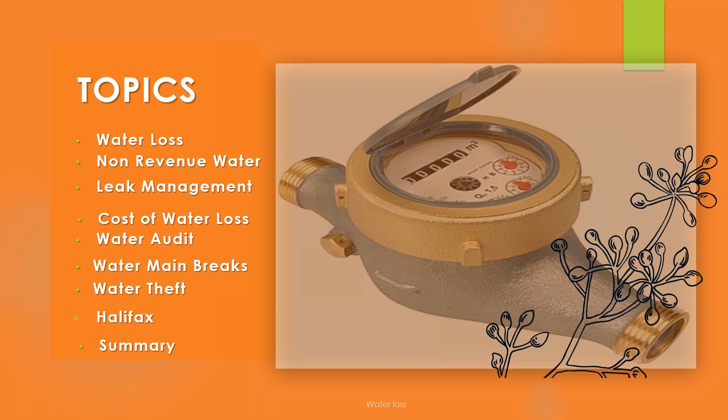In regards to the water aging piece, I've kind of put that in among these topics, so as they come up, we will chat a little bit about them as well.

So let's start with the introduction. We all know safe drinking water plays a crucial role. It promotes everything in our communities, right? It's health, food production, green grass, manufacturing. So really all aspects of our life, water touches. Over the years, we focused really hard on getting the water to the customer, making sure it's safe to drink, and I think most of us in the industry today have done an outstanding job of this, but we can do a better job.

Now we've got to look at some of the revenue and how we actually do business. So we have challenges, we all do, and every municipality out there does, in order for us to do business. We do such a fantastic job. So now let's look at how we can be efficient in supplying and making sure that we're making revenue so that we can continue to serve our customers.

Again, one big thing, and you guys have all probably seen this in the last few years, is the whole topic of capital reinvestment. All our pipes are getting old. So it's really important now that we're making a move to make sure that we're upgrading the mains that are in trouble. All our infrastructure is aging, and we need to make sure that we're putting better infrastructure in the ground.

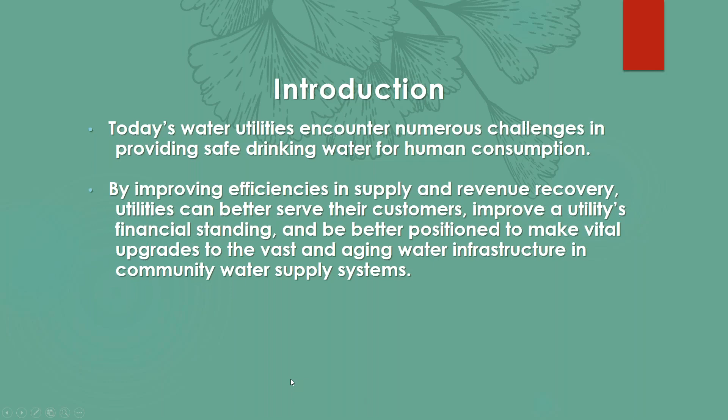You know, abundant resources, it was always available for us. But we're seeing some stuff happen now, right? Climate change, and we see it. We've seen it with the droughts in the Okanagan, the weird rainstorms in the Lower Mainland, look at Merritt and those places. Huge changes in our weather patterns and all these environmental stresses that are out there. So for a lot of the water utilities out there, the amount of water they have today is likely the greatest volume they'll ever have. So let's make sure we're treating this with utmost care. We have to make sure we're accountable in the practice of delivering the water and highly efficient in the operations.

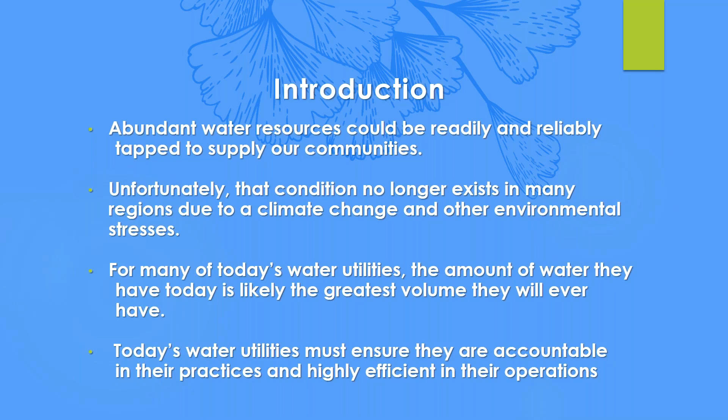So here's what we're seeing, right? Droughts and weird weather patterns. So we just got to make sure that we're on it.

So let's talk a little bit about water age, and it's exactly what the title means. How long is the water in our system? We do a good job bringing this water in, we treat it in various different ways, whether it's just basic chlorination and disinfection, or a full treatment process. That water leaves our facilities, goes out into our pipe network, into reservoirs, and makes it to our house. That takes time.

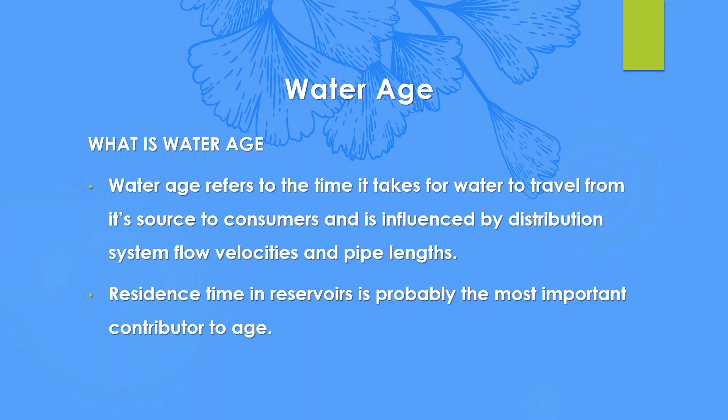So that time it takes for the water to travel from our treatment facility to our customers is influenced by the distribution, the flows, how long our pipes are, how long it sits in those reservoirs. So we have to really start thinking about this. What's a reasonable time to have water sitting in our system? And then we have to look at, okay, if the water's not leaving that reservoir in a given amount of time, what are we going to do about it? And if you're living in a municipality that has different requirements due to agriculture, or people use a lot more water in the summer for washing cars and watering grass, that makes a huge difference. So adjustments are going to have to be made to the operation of the system in order to keep that water age correct.

When we look at it, we're going to do kind of an assessment. It's always good to figure out what is the oldest area of water in our system. We all have dead ends, maybe areas that don't have big usage, or larger facilities that don't have a lot of usage. The age of the water affects the chlorine levels, and when there's chlorine decay, we all know there's potential for biological growth, so we always have to be aware of that. Areas of low demand create low velocity, and that in turn creates increased water age. For those of you that use technologies like altitude valves to fill reservoirs, you always have to make sure the turnover in these reservoirs is correct, or else you end up with some dead spots.

We all know some of these older reservoirs have one pipe in and one pipe out, and you get these cells in there that don't move around.

Mixing and reservoir management are top things you need to look at to manage water age. Water age is really a simple surrogate for evaluating some of the water quality issues in your distribution system. Take a look at what you have coming in for complaints, maybe that's one particular area, maybe it's more widespread. The distribution system tanks are definitely a major contributor, and some of the older tanks lack the baffling, with just one pipe in and one pipe out. I think all the new ones coming on are much better designed. Hydraulic modeling in your system is a really valuable tool for examining water age, and this modeling can identify the problem areas and look at solutions that could be done to rectify that.

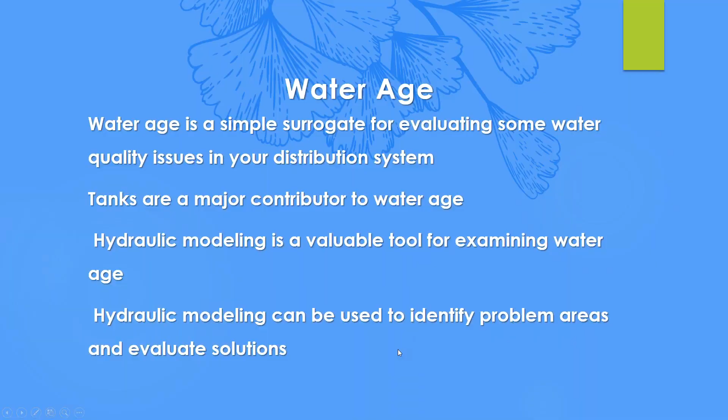Let's focus now a little bit on the water loss side of it. I'm really curious about water loss because I think there's a bunch of stuff out there that we don't even realize, and when I was writing this particular form, I was like, oh wow, I didn't even think of that. So let's go through some of these things. So what is water loss?

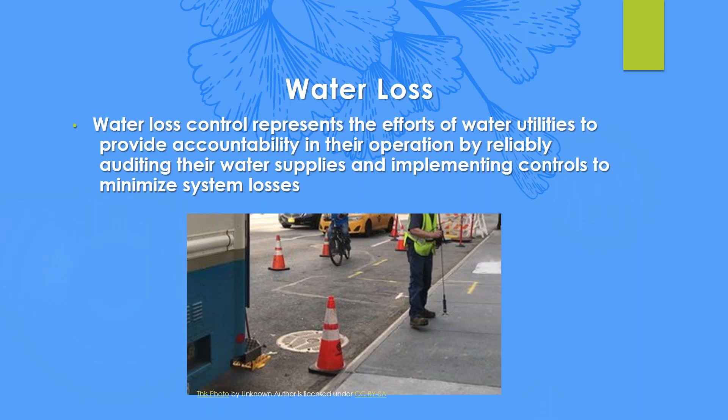It's the efforts of a water utility to provide accountability in their operations. We want to audit our water supplies. Typically we do a really good job of bringing water in, knowing how much we brought in and how much goes out the door. A lot of us have the larger flow meters, so we know exactly what's coming through those stations. But once it leaves our facilities, do we really know how much actually gets to our customers?

You don't know what you got till it's gone. I know that's a cheesy 80s song, but it's really true here. How do you know how much you're really losing? So it's really important now to look further into what happens when the water leaves our facility.

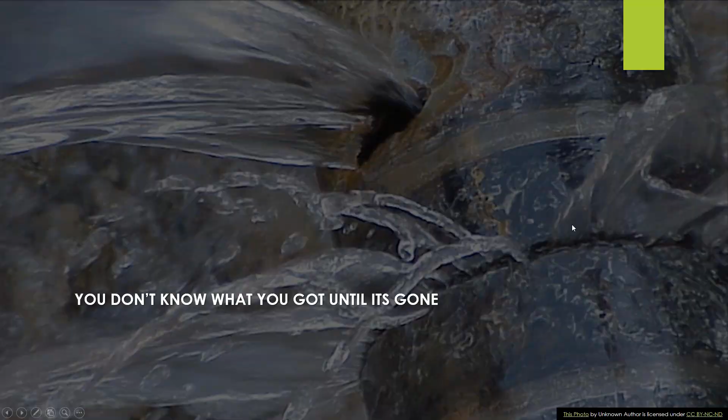Utilities, big and small, incur losses, typically pipeline leakage and apparent losses. These are the losses we don't even think about. When you see a water break or a leak, that's really easy to get your head around. We'll talk about something called apparent losses, and that's really going to be something to talk about here.

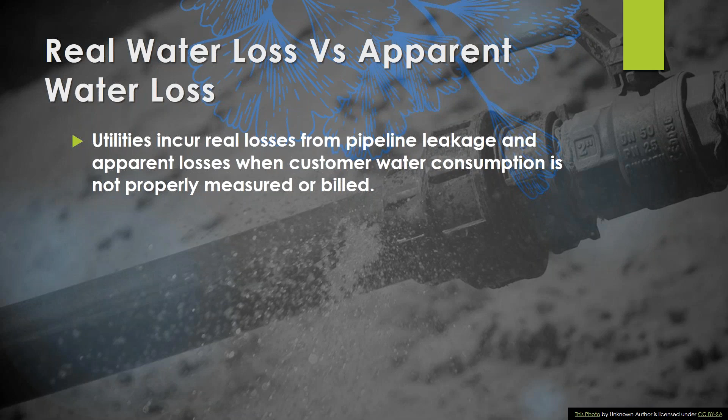This could be a number of things. The biggest one is that consumption is not properly measured or not properly billed. If you look at folks out there who do not have a metering program or do not meter their water, that's a huge one. We're estimating or assuming how much water is being consumed by our consumers.

No water system's perfect. Everybody has losses, and that's going to vary from system to system, and that can have something to do with how much water is going through that system. How old is that system? How well was it built? What type of pipe is in there?

Unfortunately, most water utilities do not regularly audit or account their supplies to quantify the losses that go out the door. And again, it's fine to have losses, but there's a cost to this, and this cost goes to our customers.

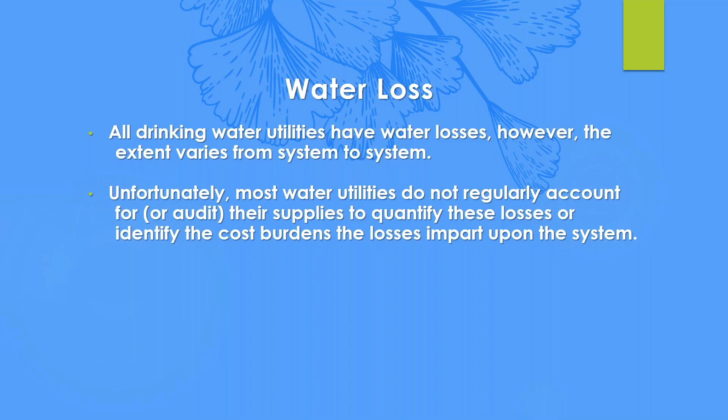We talked about that first one, right? The losses in utilities include the physical escape of water from the pressurized piping system, and that's leakage - that's real losses. But the other side of the coin is inaccurate metering of the customer's consumption, theft is a big one, and maybe issues in the billing itself.

One big one I always shook my head at is that we pay for water and new subdivisions get built and we put a reservoir on the hill. None of the houses are built yet, and as one or two houses come online, that reservoir is full of water. Now, because of the importance of water age, that water times out. So what happens is your crews go out, use a fire hydrant, and basically flush the water that's aged out of that reservoir and put fresh water in.

That water leaves - it didn't go through a water meter, it did not go to a customer. It was lost, and because it was lost, we didn't get revenue for that. And when we don't get revenue, basically everything costs more for our customers.

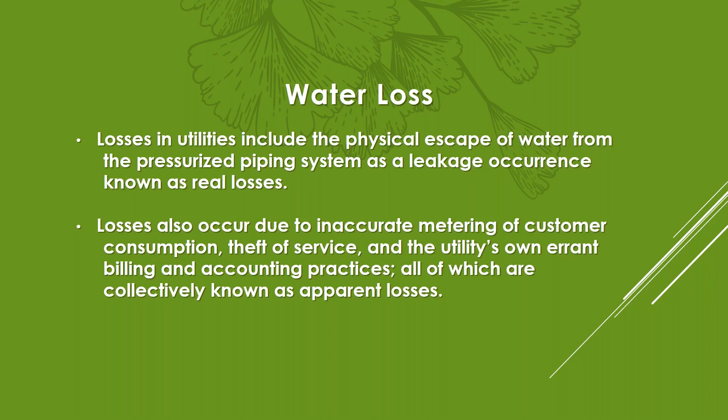Another one is the older, poorly constructed pipelines that are out there, and we all have them. Stuff that was put in the 70s and 80s is starting to leak a little bit - maybe they didn't have the corrosion protection they should have. For those folks who use ductile iron pipes, you see what happens - valves and things of that nature, they leak. Maybe there's a problem with the bonnet, maybe there's some damage to them. These all form contributing factors to the leakage.

One effect of water leakage, besides the loss of water resources, is reduced pressure. So you have a subdivision where maybe the pressure isn't quite where it should be. As a utility, maybe you tweak the pressure reducing valve or pump a little harder to increase that - and that's energy consumption, and that puts strain on other portions of the water supply system.

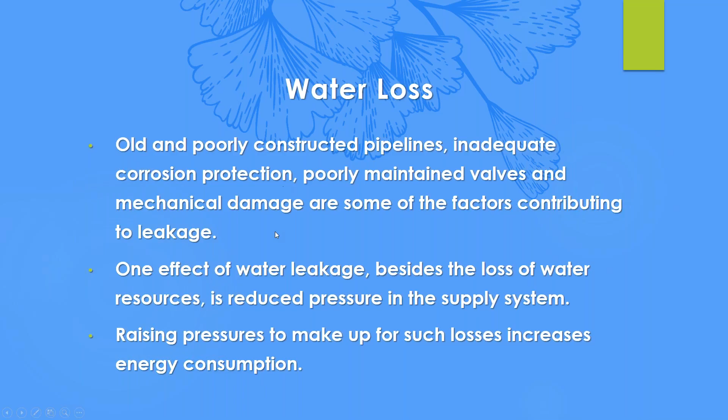Just a rough note here - let's aim for 10%. If I have 10% water loss, I think we're doing pretty good. But as you start creeping to 20 to 30%, we really need to think about what's happening. Think about 30% - if you have a facility putting out even 1 million liters a day, think about what 20% losses is, times that by 365 days. That's a significant amount of water out the door. And if you look at your bylaws, or if you're charging for water, that's a loss of money, because that water did not end up at a customer and was not purchased.

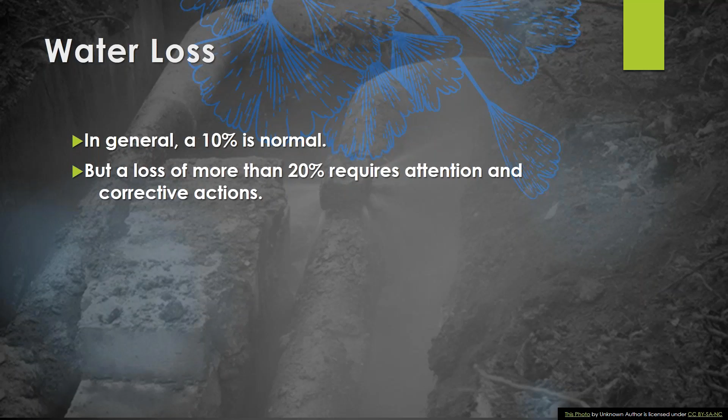Let's talk a little bit about non-revenue water. That's something we don't even think of. This is the real plus apparent losses, along with the unbilled authorized consumption. This represents water that's used for things like firefighting or hydrant flushing. Most people working in distribution have flushed hydrants, right? You open up that hydrant and water escapes. In a major structure fire, there could be up to 3 hydrants pumping water, and that's all authorized consumption, because that's the whole object of a fire hydrant. But this water does not go through a water meter, and it's not captured.

Non-revenue water comprises the volume utilities lose from their water supply infrastructure. We still have to treat this water. We still have to get it from the environment. We have to add chemicals to it. We have to make sure it's safe. So we still have to go through all the motions. It's just that we're not recovering the revenue.

It's lost revenue from a portion of this supply that reaches the customer and isn't billed. That's the big one. We're flushing that hydrant as part of maintenance. Imagine if you have a medium-sized community, how many fire hydrants do you have? How long do you run that hydrant for? If you added up the amount of liters that come out of these hydrants for maintenance purposes, that's non-revenue water.

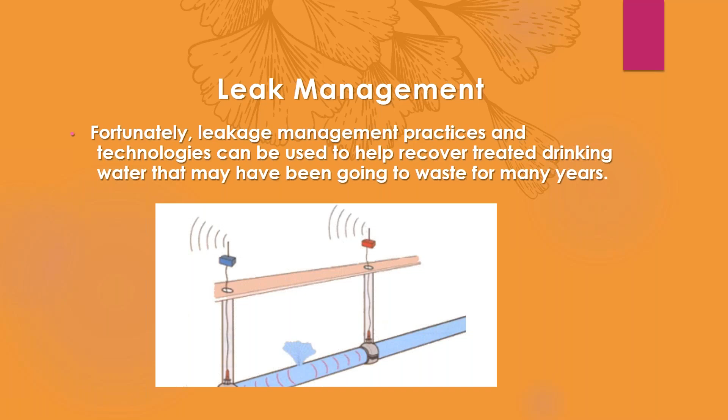We can also put loggers and different listening devices onto hydrants and valves overnight, and you can get an idea if there's potential leakage anywhere. Ground microphones as well, so you're listening. It's really a game of let's listen and figure out where and if there's a leak. Let's not wait till we see it come to the surface. Let's do a whole sweep of our infrastructure to make sure all the water's staying inside the pipe and it's not running through.

Typically what they'll do is go at about 3 in the morning, when there's very little traffic out there, so it will listen and be able to determine if there's leakages. Sometimes we do hear it, and we'll go back out again just to make sure - maybe somebody was doing their laundry at 3 in the morning - so we'll do it over a number of days just to make sure the data is correct.

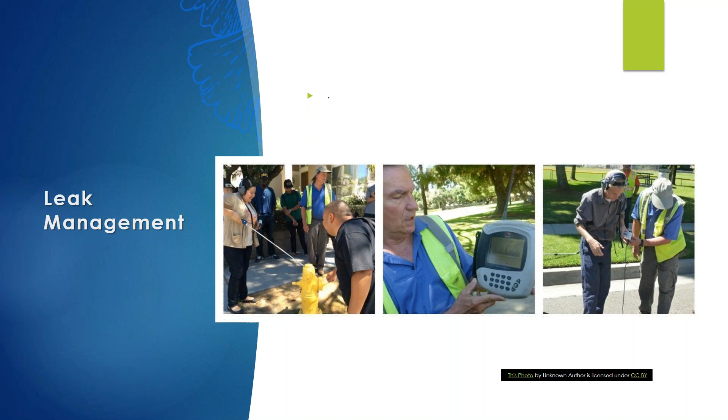Apparent losses mean that water utilities do not realize all the revenue needed to reinvest in the system. Really what that means is I think I'm getting all the water, but I'm not. And all that water that's leaving, I'm not getting revenue for. That means I don't have the revenue to do the repairs or reinvest in the system and keep up on the maintenance costs.

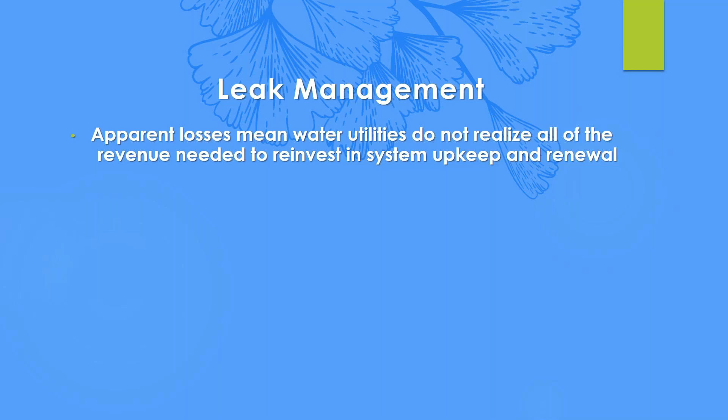By minimizing the apparent losses, utilities can bring in additional revenue, which is fantastic, or not lose the revenue they projected in the first place. That helps fund the system renewal. And really, that is the big thing - aging infrastructure. I said that earlier in the presentation. It's happening to all of us, so we need to be prepared for this.

So what's the cost of this? Losses cost money, so let's really look at how much this really does cost.

The cost of producing drinking water varies from utility to utility, depending on what you have for a treatment process. You can have a very simple groundwater well and add chlorination to it, or you can have a full-blown water treatment facility, adding different chemicals and using a fair amount of energy to produce the water you need for your customers. Again, there's a big difference between a smaller system and one that puts 100 million liters out the door a day. And geography matters too - what do you have for water? Am I pumping it a long distance from the source to the treatment facility? In some places, they have a greater cost for energy than others.

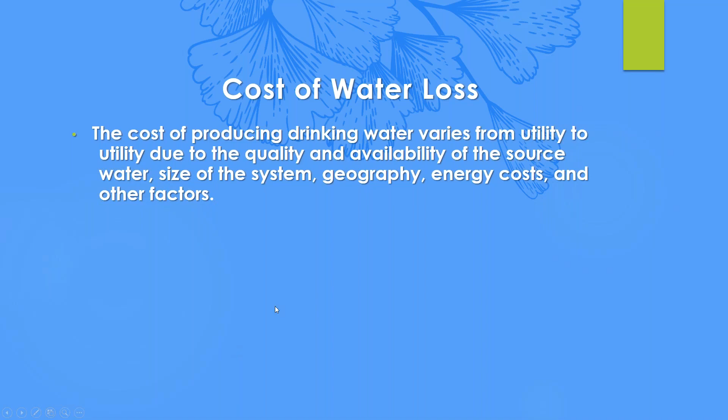Typically, we withdraw water from a source - rivers, lakes, or groundwater, or a blending of a number of these. Water is then treated to regulatory standards and pumped through an underground piping network, finally reaching your customer.

A lot of places will purchase treated water from neighboring systems, and when you're purchasing water, that's a huge cost. All of this is a cost associated with treating water. We also have to pay our staff, we have to pay the administration, and we have to pay the electricians and millwrights and contractors that keep this going.

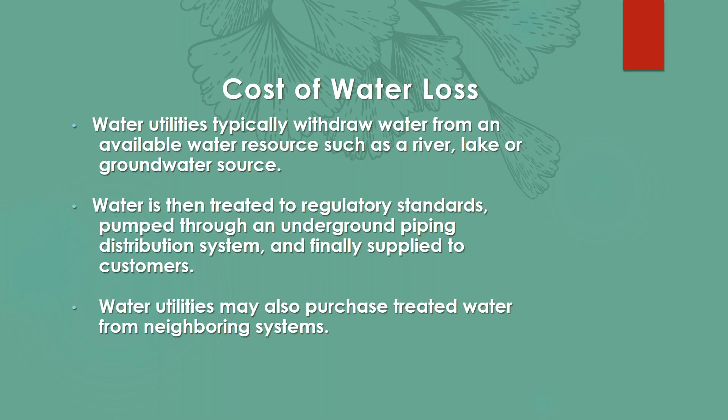Most utilities now include water meters. And I think water meters is a fantastic thing in regards to this. It's really hard to account for losses when you don't know what's going to your customer.

So most utilities now are moving towards a water meter based system. And that basically measures the supply of water, records the quantity, so that I'm billing on what you actually used.

Imagine, in the old way of doing it, you have two houses, very similar size, and one has 4 kids and the other one's just a retired couple, and they get charged the same. One's using 4 times as much water than the other. So it's really hard for a utility to estimate how much water is used and how much revenue is brought in.

Unfortunately, all utilities incur some sort of inefficiencies or losses throughout their system, both in supply and because of customer-related functions in the operations. It's a long, twisted way to get water to your home, and there's a lot of spots in there where it can go sideways.

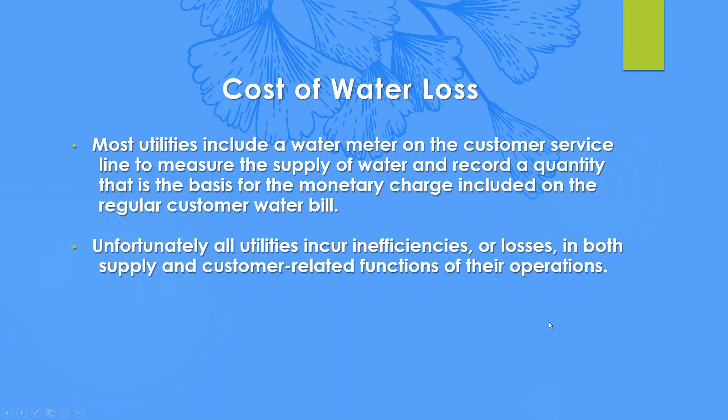The cost impacts, such as quantities of losses, are hidden from utilities and their customers, right? The water rates go up. We're adding 10 cents more per cubic meter onto your bill, and you don't really realize it, but it does happen. The paying customers ultimately bear the financial burden of the utilities' inefficiencies, and we have to do a better job of making sure that we're efficient.

In the exercise of setting water rates, that's done by an estimate. We're saying that there's this many people, and based on historical data, this is how much they use, and this is how much we should charge in order to pay for the system that's running, be able to do the repairs and maintenance, and also have money for capital reinvestment, replacing some of that aging infrastructure.

When all of a sudden we have more and more leakage, that water is not getting collected in our customers' homes, not getting revenue, and that becomes a big issue, and we have to start raising water rates to reflect that.

Water utilities set customer rates and charges that are specific to their own cost of doing business. And that's going to be different no matter where we are.

When a utility experiences this leakage, especially in its water distribution, the losses drive up the production cost. And basically, we also have to withdraw more water from its sources. We talked earlier in the presentation about climate change, and if you have a low reservoir to begin with, any sort of efficiency we can achieve is greatly appreciated and helps all the communities out there.

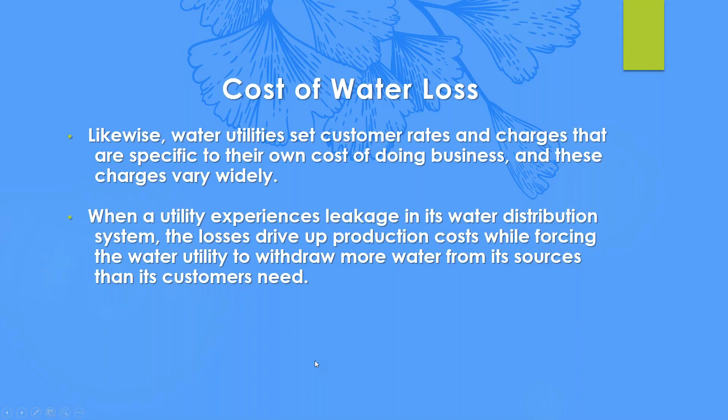We'll talk a little bit about the apparent losses now. This is the inaccurate customer meters or theft or billing issues. Again, it's just as important as the leaky pipes in the ground. It means that there's an error. Granted, we're not losing physical water, but we're definitely not paying for the water that's either going through the meter or not.

So utilities with relatively high water rates and charges suffer a relatively greater impact due to uncaptured revenue. So imagine that, right?

The combined annual financial impact of real losses, which are physical, and apparent losses in the utility operation, could reach millions of dollars. Think of a place like Metro Vancouver, which could produce 1.8 billion liters a day. If you were losing 20% of that water, do a quick think about that in your head. What's 20% of that? That's a huge amount of water and a huge amount of revenue that could be lost daily if things weren't looked at.

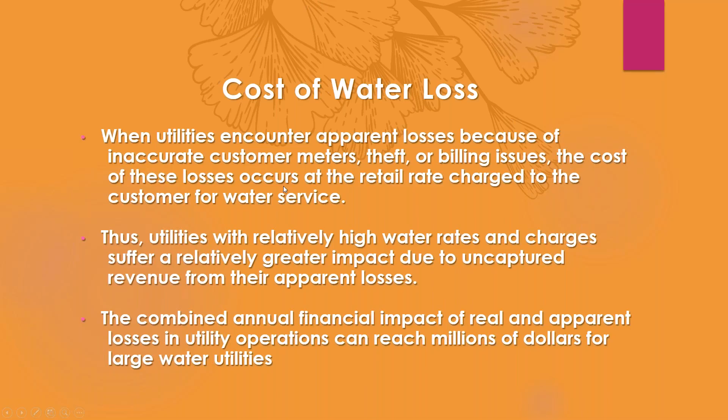So one of the things we'll talk about is the AWWA water audit. And I think that's really important to talk about.

Even if we're not using this particular one, a water utility should track the annual volumes of water they manage. They should measure not only the amount of water supplied to the customer, but also the water lost. So really looking at everything we do when it comes to water audits, we're going to look at what comes in, what came through the treatment process, and if you're metered, how much actually made it to the customers.

We should always track the loss. The other thing we should look at too is in our audits, making sure any major events that have happened, that could be major leaks, major fires, anything that used a lot of that non-revenue water, we should actually be logging this and trying to figure out an approximate volume each time that's used.

The foundation of a water loss control program is really that annual water audit. Let's really think about how much we've used. It's a systematic examination of records and financial accounts, really, that make sure it's accurate, and making sure that I'm going to charge you guys as a utility owner the correct amount, that we're not losing, that we're not putting out water that we're not capturing.

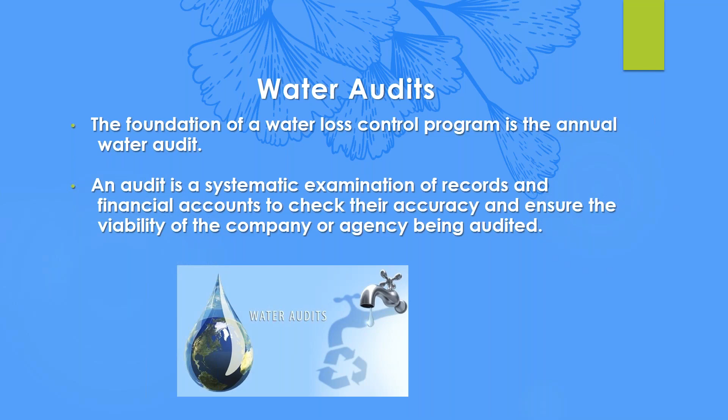Now, audits are common in the world of finance, right? You get audited all the time. We should be doing this here in our water utilities. We need to look at the records, the data. We need to trace the water from its source through the treatment process into the pipes, into the customer's homes. And we need to figure out, where are we losing water?

We'll talk about the Halifax example in a little bit here, but you can also put meters into zones. So now you can kind of pinpoint potential losses between the zones of water. Maybe that goes into a pump house, or you're looking more at your reservoirs, but definitely looking at how much water is moving around the system and quantifying where that water is.

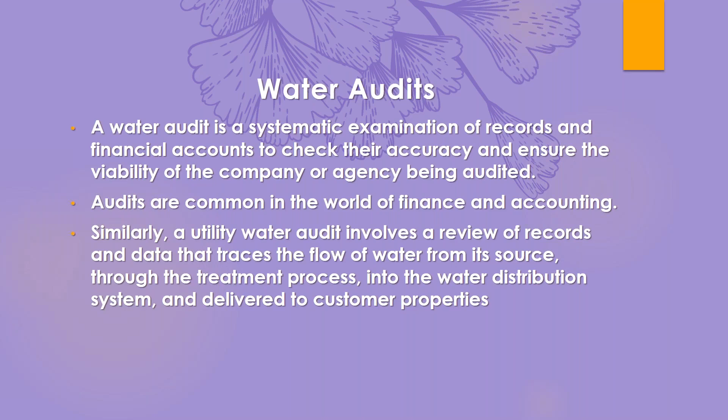The water audits usually exist in the form of a worksheet or a big spreadsheet or something on your computer, and that's going to detail all the water supply. And I think we do a good job of that. Most of you have to put a report out to your health authority in order to make sure that they're aware of how much water you've produced. What we're looking at here is let's just go that one step further and figure out the correlation between how much left your facility and how much is going to your customer's home.

The standard water audit also tracks the cost and calculates a variety of performance indicators. This assesses the efficiency of the water utility. These could be great tools. So you end up with a benchmark that you can use year after year. And if you start to see things degrade further and further, now what you can do is say, hey, City Council, I need funding to replace this water main because we're actually losing this much dollars. And I think it goes a long way when you can start proving things like that. Things make sense.

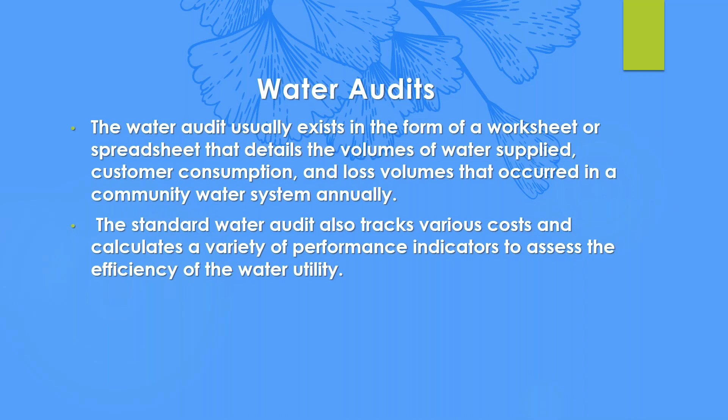Check out this stat here. This is really interesting. So in 2013, AWWA looked at 246 water utilities, and basically the apparent losses was 29.4 billion gallons. Like, imagine that. That's a ton of water.

And that really, when you look at that much water leaving and the rates of those 246 utilities, we were losing $151 million a year. Imagine what you could do with $151 million in your little utilities. That's extra parts, pieces, shovels, pipes. That's all from lost water. So it's really important to think about this. This is not a little thing. This is a huge amount of water.

With the development of the AWWA methodology, and that's the one that's most widely used in regards to the water audits, it's available to every water utility. They need to audit their supply and distribution.

The water audit also provides the foundational data to plan a cost-effective strategy to control excessive losses. For those of you getting into the asset management world, it's really now important to figure out the shape of our assets, right? Maybe it's just age of it, but now let's look a little deeper. Maybe age, material type, and with some data we have here, we can kind of look a bit more in depth at where our problem areas are, and that will help in our asset management.

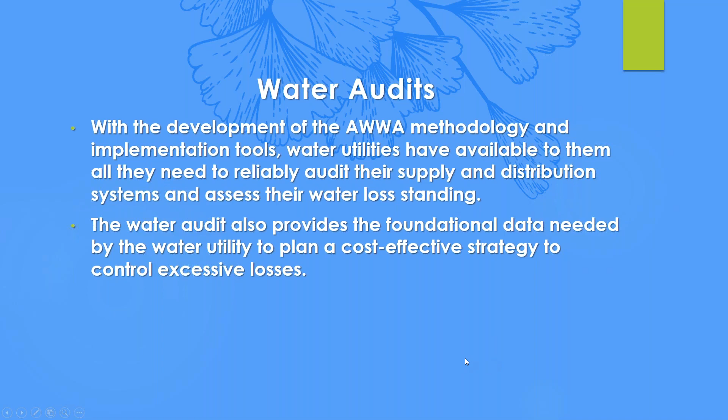Let's talk about water main breaks a little bit. That's the easiest one to capture. We talked a little bit about this asset management program. This is where it really comes into play in planning a leak management program. Now we're not talking about apparent losses, these are the real physical losses.

We should determine the nature of breaks or leaks. What is it? Is it soil type? Was it the type of material we use causing issues? Maybe it's one type of material causing more issues than others. We need to carefully document what's actually happening out there. Why is it leaking? What made it leak? Maybe we can now start targeting this for the future.

There's lots of places this could be: water main piping, fire hydrants, the customer's lines. The nature of repairs too, and related information as the damage. Taking a look at the pipe, getting it more assessed. These are all things you should be looking at. It's not just a water break where you go in and do the repair.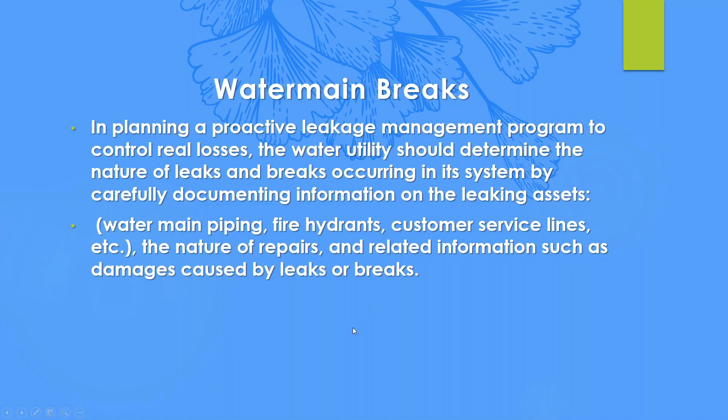Other things you should look at too, and we don't even think about this, is system pressure, right? If pressure changes in the system, that should be a real wake-up call to you. Something's changed, and we should really look at that. We need to also look at the cost to conduct leak detection work. Maybe we bring in a contractor, or we bring in our own forces to do the leak detection work. We need to look at better managing excessive pressure, making sure that's not from improper PRV maintenance or something along those lines.

We should also be working in our capital reinvestment to renew the water piping. You need to look at all this data, and the right combination of repairs should be placed to bring the leakage down. Remember, everybody's going to have leakage, and 10% leakage is still pretty good.

One of the things I think is part of asset management, and people are starting to do a really good job on it, is using a risk and criticality matrix. That basically looks at, okay, I have a dead end main, I have a ductile iron pipe that's got a small leak on it, but the risk is low and it's not a critical main, it's at a dead end. Versus that same main, maybe it crosses a major highway, maybe it feeds a hospital. There's a lot more risk and criticality in that particular main. So it's applying these risk and criticality factors to your asset management project, knowing where the mains in your municipality are going to cause the most risk, and therefore it's most critical that we make sure they're sound.

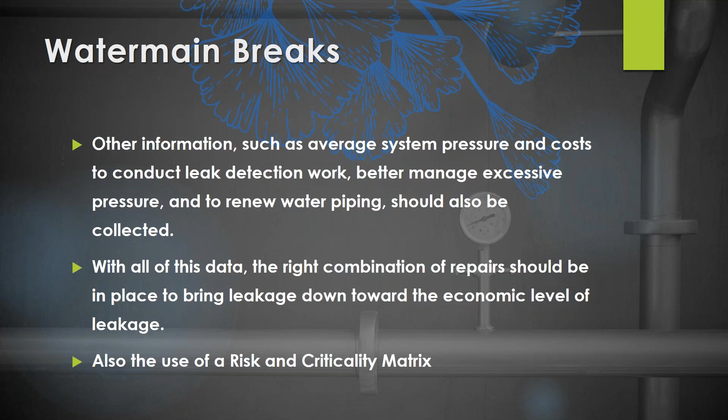Utilities should also review how they do the repairs. Band-Aids are great, but we shouldn't rely on them, right? We all do it. We put the repair clamp on, and this main has 5 repair clamps on it. These are all Band-Aids. Keep in mind, when you put a repair clamp on, that is no different than a Band-Aid.

I know it's hard, but those are the things we need to start tracking so that we're moving towards main replacement, because if this is leaking in this particular area, maybe it's leaking in other areas in this nearby vicinity. So we need to make sure we're looking at our policies and how we're repairing these mains.

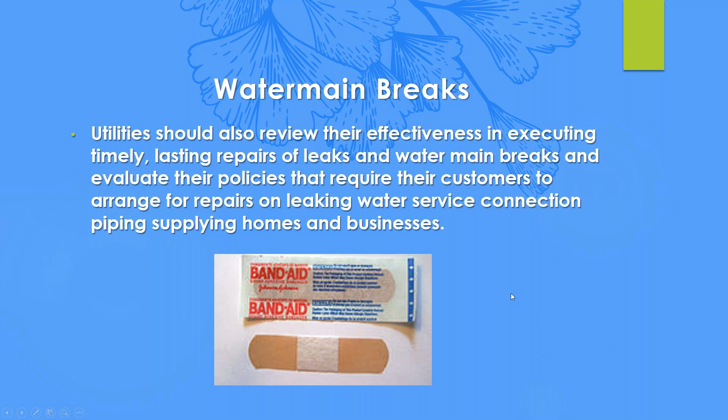The other one that's kind of scary too is some utilities place responsibility on customers to pay for repairs of these lines. A lot of leakage can happen between, say, where it comes off the main owned by the utility and the meters inside the house, and that leakage isn't controlled by public interest, it's private. So make sure there's a mechanism or some sort of inspection to ensure the materials used in repairs, especially on the private contractor side, are correct. Also, when you use private contractors to install any infrastructure, make sure it's inspected and done to the policy and standard required for your municipality, because the last thing you need is more problems, more leakage.

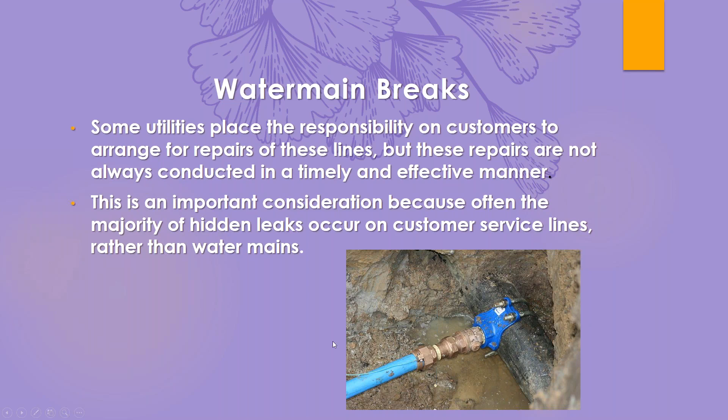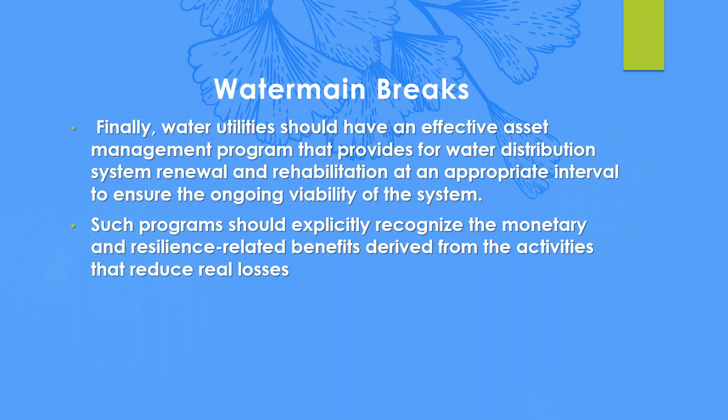Finally, water utilities should have an asset management program. Even if it's not official, you should have something that tells you what infrastructure needs to be replaced in the next 5 years. There should be some sort of system of renewal or rehabilitation at a correct level, not 1% or 2% of the mains. We should be working towards a larger percent of capital reinvestment. Again, this isn't cheap, and unfortunately, since we're all dealing with public money, that sometimes becomes a real challenge for water managers out there.

Let's switch gears over to theft. Theft happens, a little harder to navigate, but it does happen. Water services are not immune to unauthorized consumption or theft. Some members of every community are willing to tamper with water meters or meter reading equipment.

I got called out a number of years ago to a water quality complaint, and the individual had gasoline or oil in his water. I showed up at his home, did the sample, and sure enough it smelled like oil, pretty strong. I said, can I take a look at where the water comes in? He got pretty defensive, but I did take a look. I opened up the meter pit at the property line, and he had a garden hose, which are pretty porous, bypassing the water meter under his driveway and hooking into his service into his home. What made matters worse is he was performing oil changes on his vehicles and dropping the oil into the driveway, so that hose was basically sitting in an aquifer of oil that was getting into his service. Needless to say, we did fine him. Don't do it, don't bypass the meters.

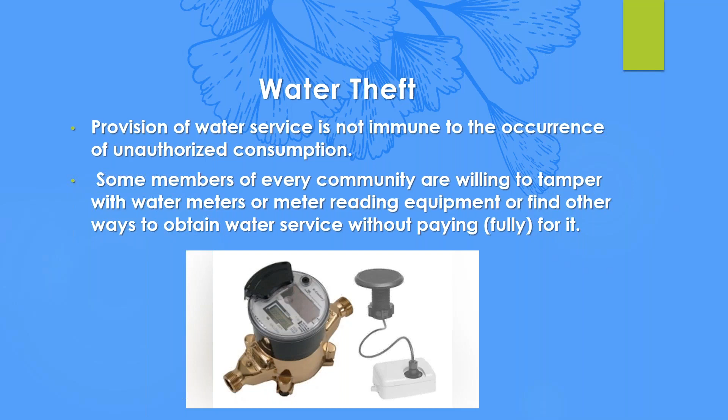So we should have a means to detect this unauthorized consumption. A lot of times, when keeping records, we'll notice a pressure drop or a flow change in a zone if we're really watching for water theft. There's new advanced metering infrastructure, called AMI, with really good capabilities to monitor customer consumption. It can look at backflow, it can detect all sorts of things, even a leak inside your home. This technology is getting better and better, and with some of it you can basically log into the meter itself while sitting in your office.

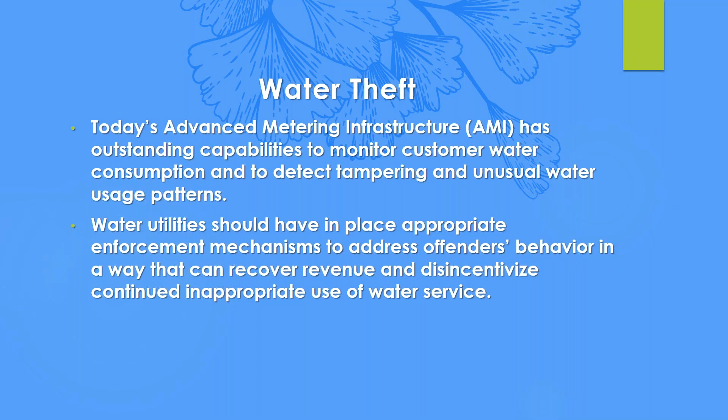The other big one is the bylaw. Municipalities should have bylaws in place to make sure you've got appropriate enforcement mechanisms to address both water meter tampering and any sort of water theft, making sure we're very careful about how people use water.

I know a lot of municipalities, what I've seen out there, is that they don't allow connections to fire hydrants, just to get away from that. They install water stations or water fill stations that people pay a fee for.

They're controlled, and they've got a backflow cross connection device on it, so that it's all done to protect our system, but also so that we're not getting any sort of water theft out there.

So for the broadest level, efficient water utilities sustain better water resources. They manage energy and they plan for the future water supply infrastructure. And I think that's really what we're looking for here.

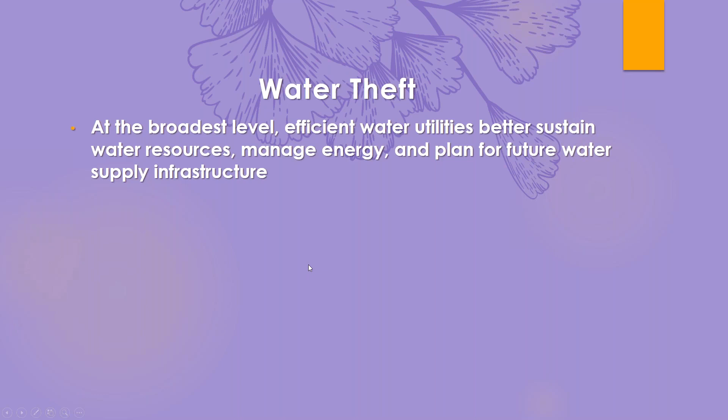An example of this is a water utility whose water resources are marginal and adequate at best to meet the demands. It would do well in incorporating a water loss control plan, because really it's those little municipalities where water's scarce that this really, really hits home.

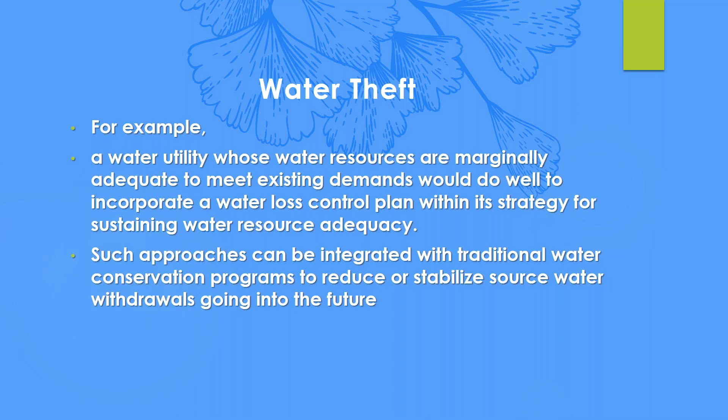We look at this, it should be also tied to your traditional water restrictions, right? Your water conservation programs out there. This should be a big part of it as well, right? Really showcasing theft and tampering and use of water. And I think you can get a lot of traction with this.

I'll end today with a little case study, Halifax Water. And I had the great fortune to visit this particular site just before COVID hit, in order to see what they've done here. It's been fantastic.

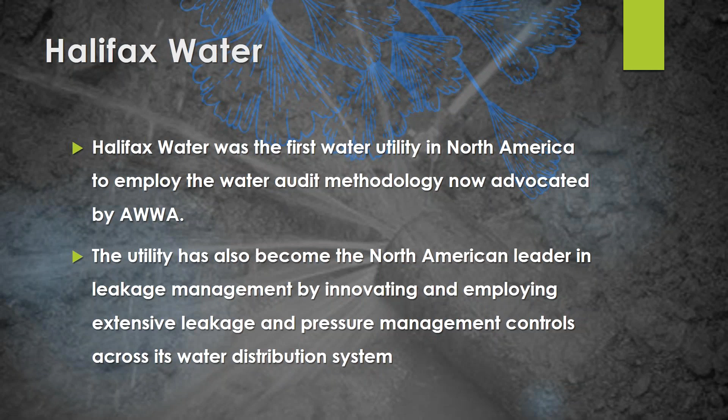It has been the first water utility in North America to employ that water audit methodology - that's the one that I gave you the link for from the AWWA. It's become the leader in leak management by innovating and employing extensive leak and pressure management controls. So huge - they're doing two really cool things here we'll talk about.

They had a real leakage problem, and that was - and again, like all sources - they had a source scarcity. It took them really looking at how much water they were using, and they saw, hey, we have some leakage, now let's look at how we can control that leakage. They did the water audit, and they came up with some measurable outcomes to this.

So basically, they've sectored their different areas of their municipality, and they've made district meter areas. They've put a large water meter chamber in between all the different areas of the municipality. So now they know what's leaving the main plant, what's reaching each of the districts, as well as what's actually going into the home. So that's an extra level right there to let them know what's going on, so they can really quickly figure out with their leak detection equipment if there's an issue.

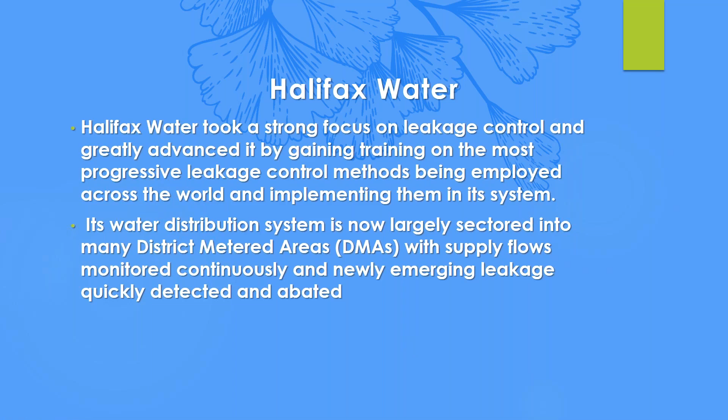And it's simple math. The other big thing they did here, which was really cool, is they employed advanced pressure management. So basically, we all know more pressure means the pipes will leak more. So when they did find the leak, they were able to dial back the pressure a bit in that particular main until they could get a fix on that.

And by lowering that pressure, it really gave a lot of opportunity to have less losses at that particular pipe. Again, look at that - they drove down leakage by 10 million gallons a day. Like, that's huge. And they saved like $600,000 in one year. Imagine the capital upgrades that could be done for $600,000, which is fantastic.

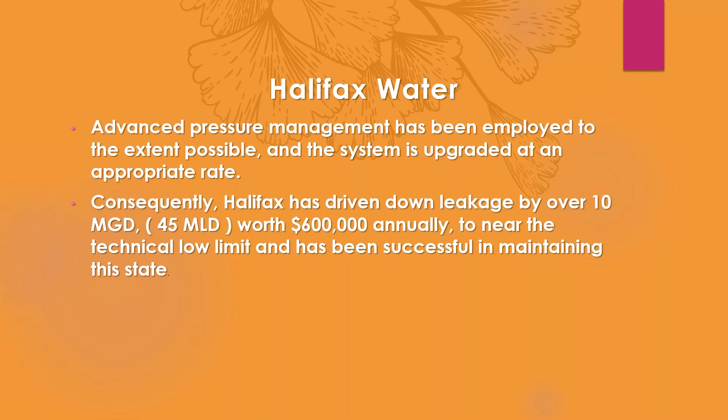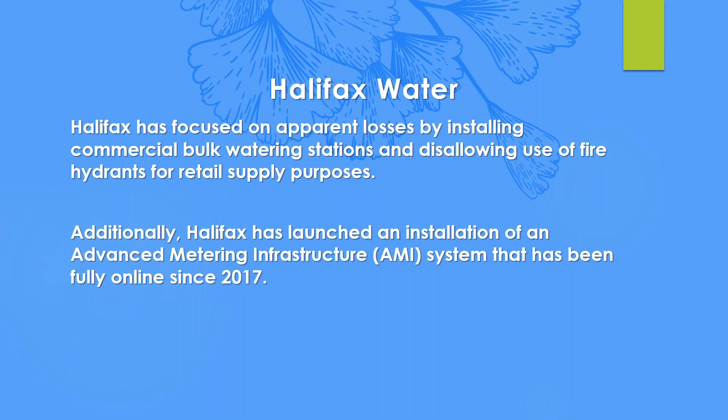So again, they also went that extra mile - nobody uses fire hydrants, only commercial bulk watering stations, which I totally agree with - I think that's a great way to control water theft. And then with the advanced metering infrastructure coming in, now they're even more advanced when it comes to looking at what's going into people's homes. This is really a good example of an older municipality that was able to employ these district meters, pressure reducing stations, as well as putting in AMI metering technology.

So to wrap this up, I think all our water utilities, and everybody on the call included, I think you're instrumental in providing health to our communities. Water is huge. You provide safe drinking water on a continuous basis.

We can't live without that. The fire department can't do the job without us. We try to do it at a cost that's affordable. We know we're going to lose - whether that's theft or leakage, we're going to lose some - and we can't always recover 100%.

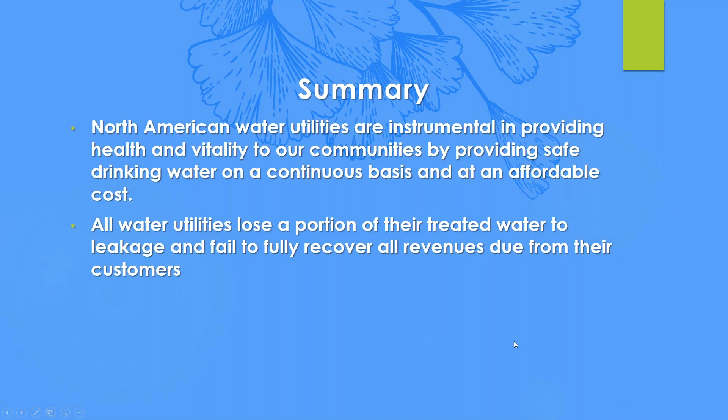But basically, we can start being efficient. These inefficiencies - basically this non-revenue water - it creates a number of problems for us. Nobody wants to waste anything. We don't want to waste power. We don't want to waste water. We don't want any damage either. By doing some extra looking and investigation of pipes and leaks, we can basically figure out a repair before they destroy the neighborhood and blow the streets apart and whatnot.

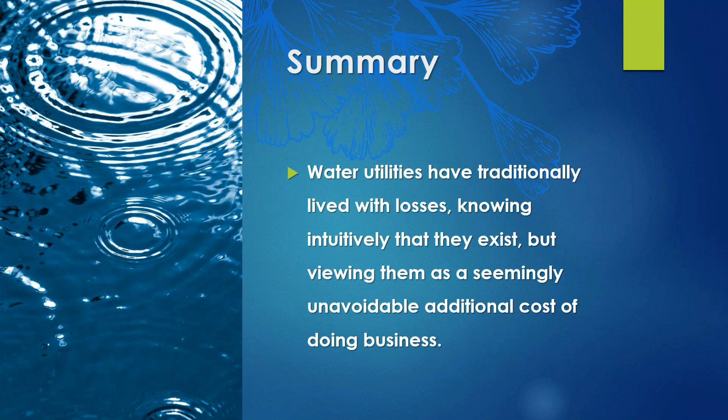You know, we've lived with losses. We know that they exist, but basically we used to view them as, well, cost of doing business, and I invite you guys to think of it one step further.